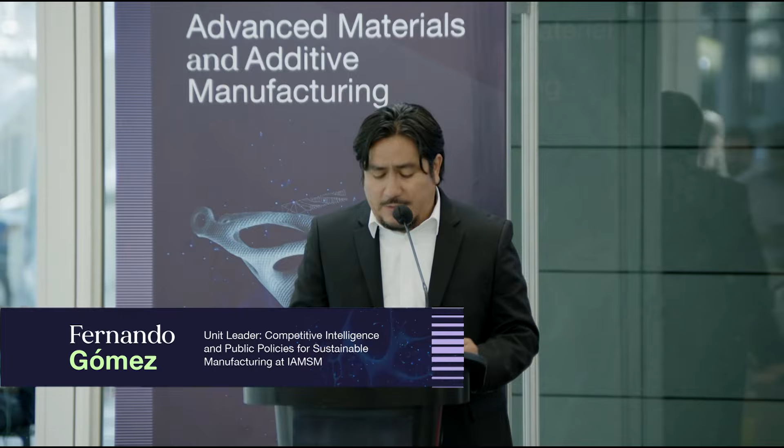Good afternoon, everyone. I'm Fernando Gomez, leader of the unit of the Competitive Intelligence and Public Policies for Sustainable Manufacturing at the Institute, and it is a pleasure to be here with you today. Now, I have the distinct honor of introducing our next speaker, Paulo Bartolo, Director of the Singapore Center for 3D Printing at Nanyang Technological University. Paulo will provide us with a unique insight into the capabilities of the 3D Printing Center in Singapore. Paulo, thank you for being with us, and the floor is yours.

Thank you very much. Thank you for your kind introduction. I would like also to thank Professor Alex Elias and Professor Arturo Molina for the invitation to be here. It's a great pleasure, and it has been a great week. I had the pleasure to attend the opening of the IAM lab, and to meet local authorities, industry, and many colleagues. And I have no doubts that what you are doing in the state of Nuevo León is the right thing. I don't have any doubts that you have a bright future ahead.

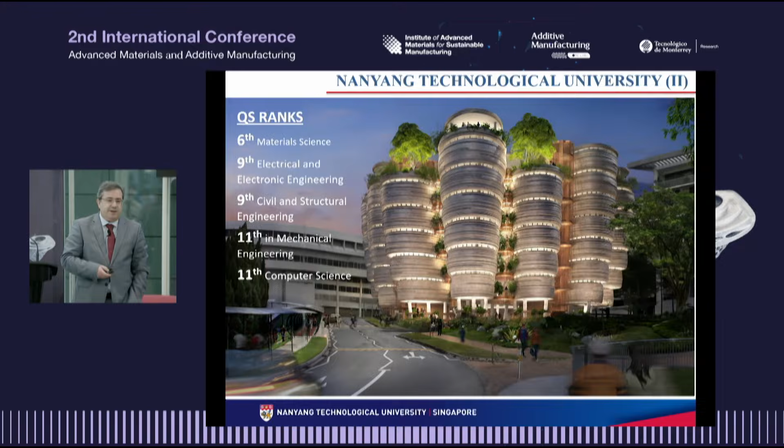Well, as it was mentioned, I'm a professor at Nanyang Technological University. This is a relatively young, research-intensive university, quite strong in science and engineering, especially in the areas of material science, civil engineering, electronics, mechanical engineering, and also computer science. And similar to Tec de Monterrey, with strong links with industry. This is part of our DNA. In our campus, we have more than 250 companies, and we have also major collaborations with industry in the form of Corp Labs. A few examples include the Corp Lab with HP, which is the largest Corp Lab outside the United States, and the Corp Lab with Rolls-Royce, which is also the largest Corp Lab outside the UK.

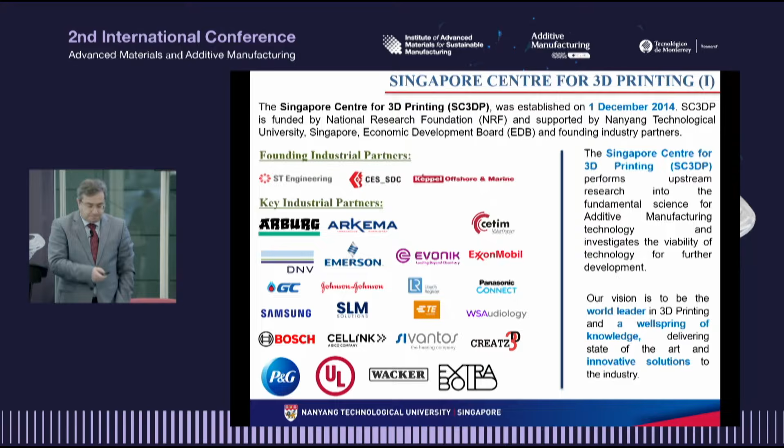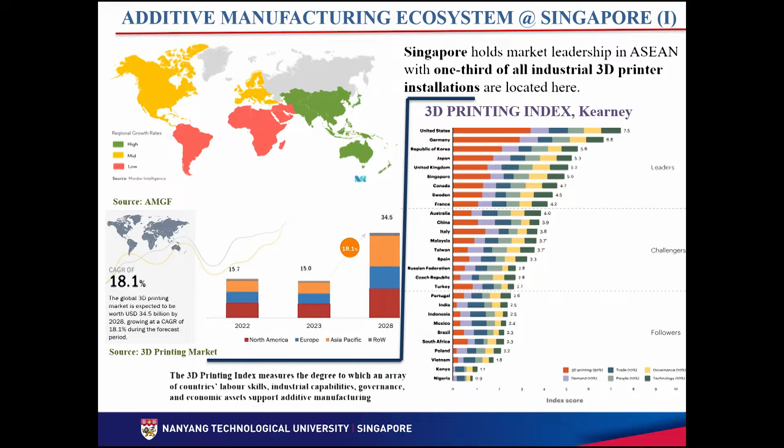Well, at NTU, I'm the Executive Director of the Singapore Center for 3D Printing. This is a research center funded by the National Research Foundation and industry, and supported by NTU and by the Economic Development Board. And we are looking at all aspects related to additive manufacturing. Additive manufacturing is a strategic technology for Singapore, and this was recognized by the Singapore government when in 2013 it committed 500 million Singapore dollars to further develop the AM ecosystem. As you know, in Singapore we don't have heavy manufacturing industry, so our economy relies on knowledge and light manufacturing. So additive manufacturing and robotics play a key role for many industrial sectors in Singapore.

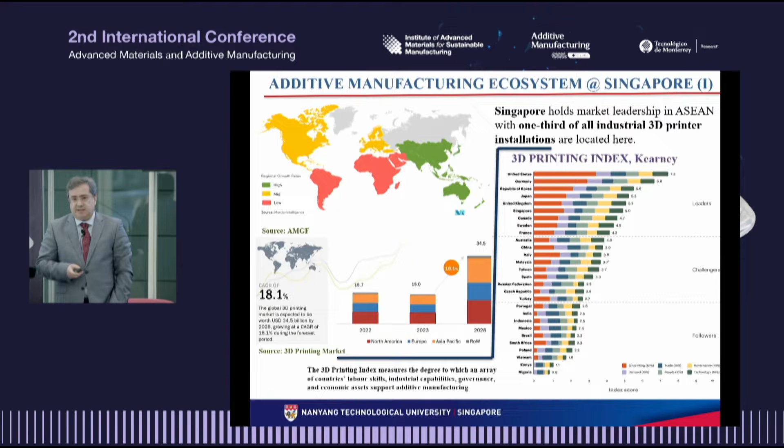Singapore was an early adopter of AM, so it is not strange to see Singapore as a leading country according to the 3D Printing Index. And to give you an idea about the relevance of this technology for Singapore, if you consider the ASEAN region, 1/3 of the industrial AM machines are located in Singapore. We have a vibrant AM ecosystem, so 25% of the global AM companies have a presence in Singapore. And the ecosystem consists of a large number of startup companies, service bureaus, regulators, and of course research centers such as the Singapore Center for 3D Printing.

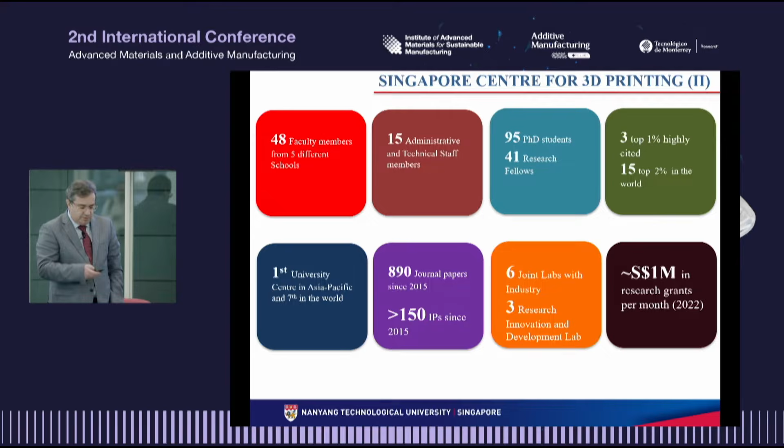We are a pan-university center. We have 48 faculty members working with us, 95 PhD students, 41 research fellows, and the activities are supported by 15 technical and administrative staff. We are very happy because the center was recently considered the best center in the Asia Pacific and one of the best centers in the world. And we have also very strong links with industry. Currently, we have 6 active industrial joint labs and 3 active research, innovation, and development labs. And I'm going to explain a little bit more about these 2 concepts later.

Well, at the center we are covering the entire value chain of additive manufacturing, from design till process digitization. And our research activities are organized around 8 pillars: 5 directly linked with key industrial sectors in Singapore, and 2 cross-sectorial pillars. One is future of manufacturing, which is about smart manufacturing, and the other one is design for 3D printing. And then we are hosting and coordinating the NAMIC Hub at NTU. NAMIC stands for the National Additive Manufacturing Innovation Cluster. It was an initiative launched by the government of Singapore in 2015, aiming to promote the adoption of AM and to build the AM ecosystem in Singapore. And we are coordinating this hub.

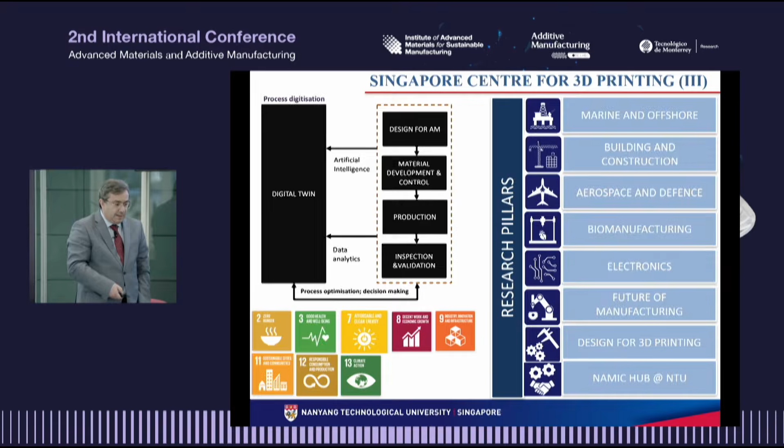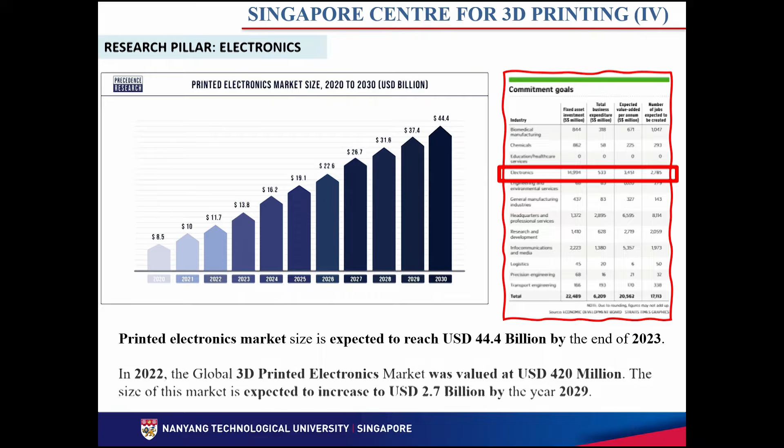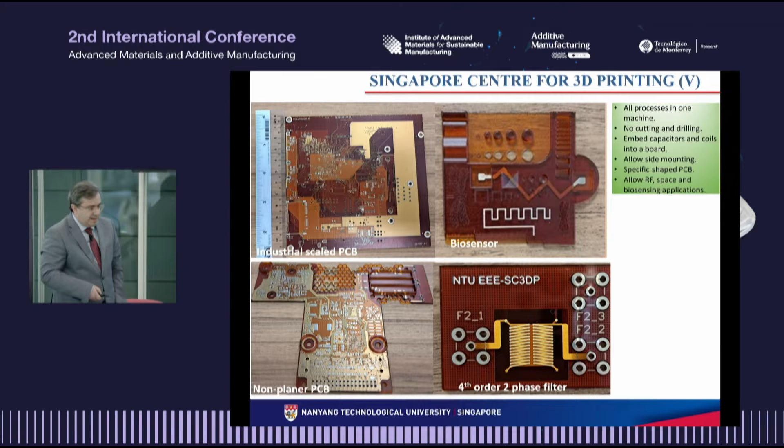The electronics pillar, and I'm going only to mention this, was the most recent pillar that we established at the center, for a couple of reasons. One is because electronics is a very important industrial sector in Singapore. And the second reason is because this is an area growing very fast in the world. By 2022, the market size of 3D printed electronics was lower than 500 million US dollars, but it is expected to grow to close to 3 billion US dollars by 2029. So we are the only center in Singapore having capabilities to print electronics, and we are using this lab to print PCBs, biosensors, non-planar antennas, and flexible electronics, as you can see in this slide.

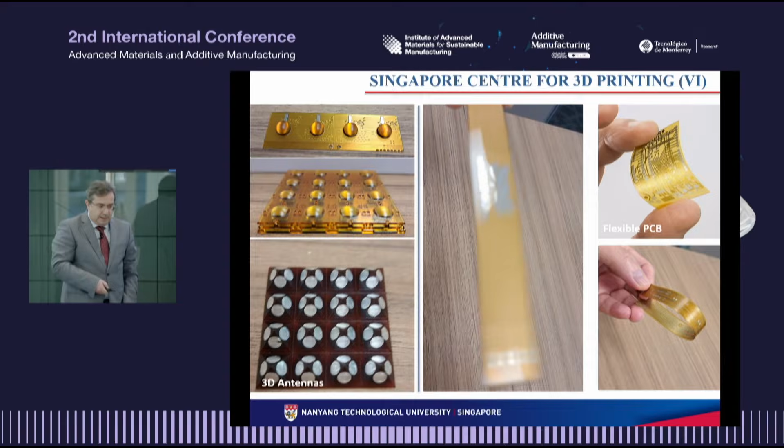We have also the normal one-to-one projects and industrial joint labs. These are major industrial collaborations, fully funded by industry, typically comprising a minimum of 2-3 projects and a minimum duration of 2 years. And then we have research, innovation, and development laboratories, partnerships with industry, but in this case, the companies, instead of supporting the collaboration with cash, they give us technology.

And in return, we work with those companies in 3 main areas. One is focusing on people, training, workshops, seminars, and the aim is to promote the adoption of the technology. The second domain is demonstration, so developing case studies with our researchers and students. And finally, development, more fundamental research projects. In this case, we seek alternative funding sources, and the aim is to license any technology that we develop by the end of those projects to these companies.

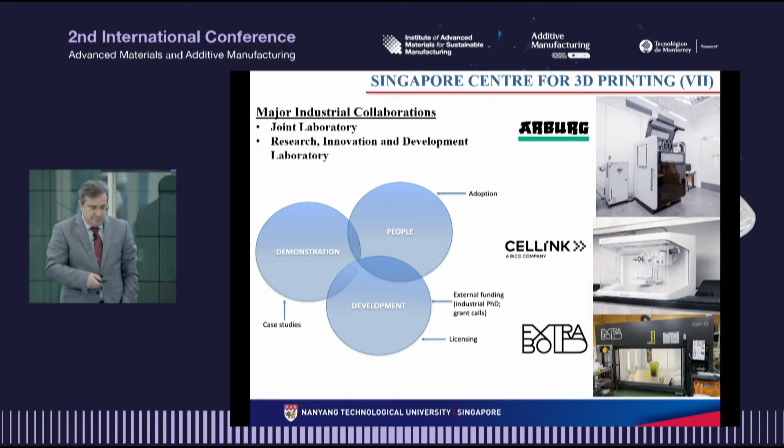We have 3 research, innovation, and development labs with 3 companies operating in the space of polymer-based AM, Arburg, Cellink, and Extrabold, and we are now discussing similar arrangements with 2 companies operating in the space of metal AM.

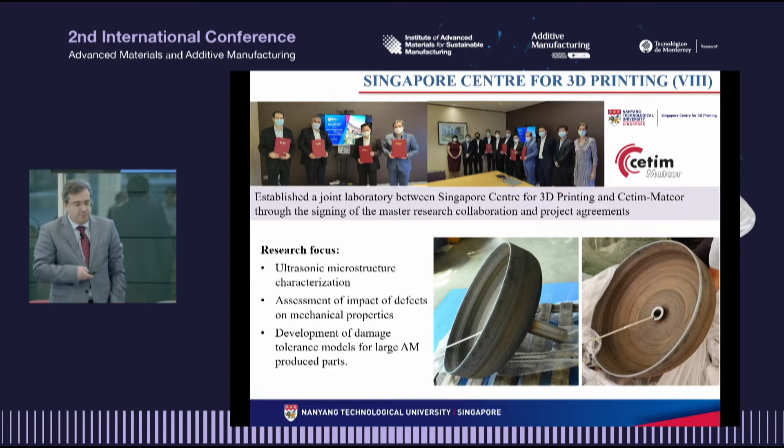I would like also to mention 2 examples of industrial joint labs. One is a joint lab that we started early last year with Cetim-Matcor, focusing on large AM part qualification and comprising 3 projects. One is related to ultrasonic microstructure. The second project is related to the assessment of impact of defects on mechanical properties. And the third related to the development of damage tolerance models for large metal AM parts.

The second example of joint lab is a joint lab that we have with Panasonic. We finished the first phase of the joint lab. The first phase was related to the development of technology to transform common carbon-based materials into highly porous graphene materials, and technologies to print such highly porous graphene on top of different types of substrates, paper, glass, fabrics, to create smart and flexible devices. We are starting a second phase of the joint lab in a totally different direction. So we are focusing on multi-material printing, electromagnetic materials, focusing on components for electrical motors.

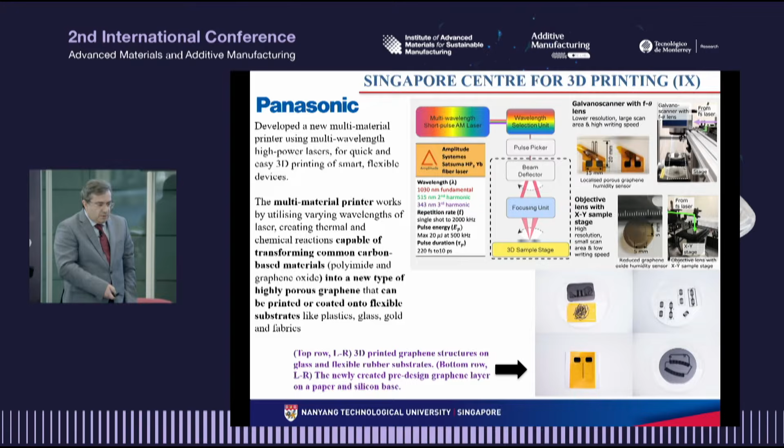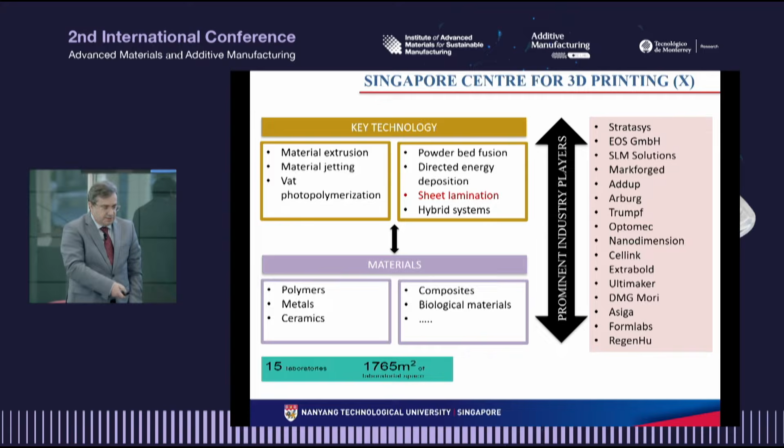Well, to run all of our research activities, we need to have state-of-the-art technology. So at the center, we have all types of AM technologies except binder jetting technology. So that's why we need to have a discussion with GE technology. We have commercially available machines. We are developing also our own systems, as I will show you. We don't have any commercially available sheet lamination technology. We are developing our own metal sheet lamination process. And as I mentioned, we are developing our own systems.

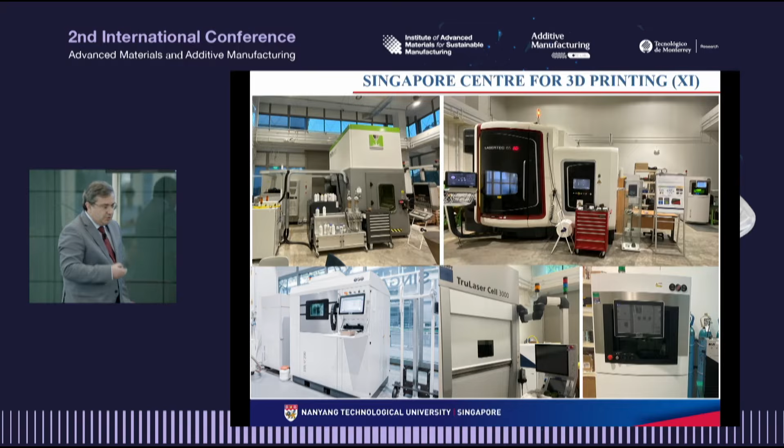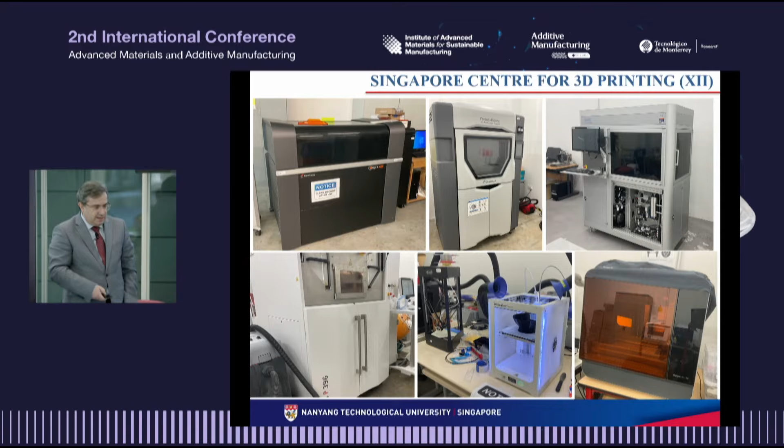So to give you an idea about our machine portfolio, these are some of our industrial-based machines. So we have a range of directed energy deposition machines, hybrid systems, several metal powder bed fusion machines, not only from EOS, but also from SLM Solutions, and then a range of other machines for polymeric materials, ceramics, and composite materials. And, as I mentioned, we are developing our own systems. One example is shown here.

So this is a powder bed fusion platform that we are developing to test different fabrication strategies, beam shaping, in situ alloying. This is an area quite strong at the center, especially for biomedical applications. We have a couple of patents related to in situ alloying of titanium-64, tantalum, titanium, niobium, to create metal plates with improved biocompatibility and reduced stress shielding effects.

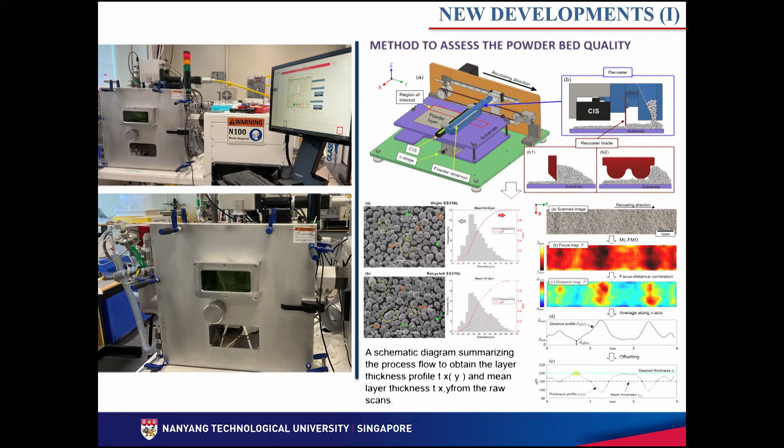We're developing other devices for this platform, and another example is shown here. So this is a scanning system being used to assess the powder bed quality, considering three main parameters: roughness, density, and thickness. Regarding powder bed fusion systems, we are also developing in-space manufacturing technology.

So as you know, contrary to what's happening in our labs, where due to gravity, particles settle, in space, due to the absence of gravity, particles scatter. There are different strategies to address this issue. One is using a centrifugal chamber. In our case, we are using acoustic waves to manipulate and to position particles in a three-dimensional space.

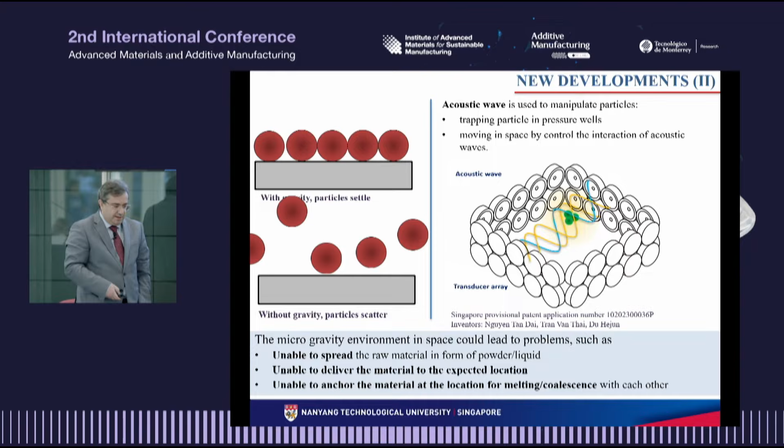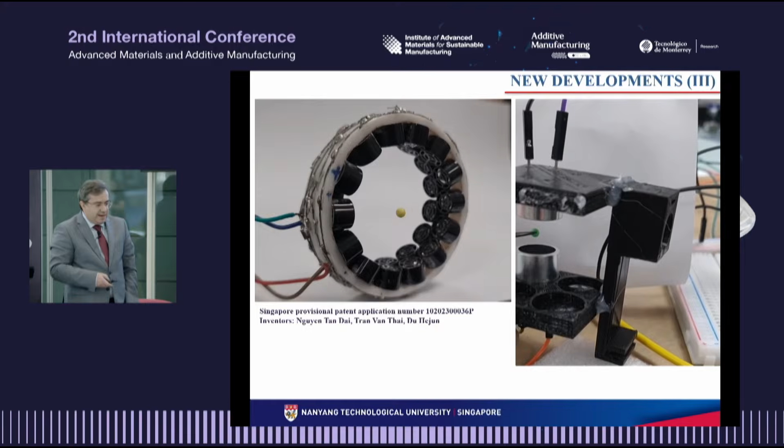And this can be visible in this video showing the change in position of this particle in a three-dimensional space by changing the acoustic wave. And if we induce any disruption to the particle, once we stop this disruption, the particle returns to the original configuration. So our aim is to combine this acoustic wave system together with a laser beam for material consolidation for in-space manufacturing.

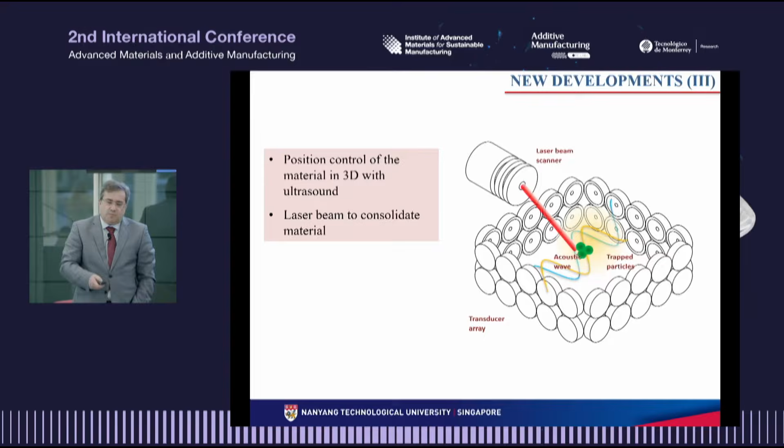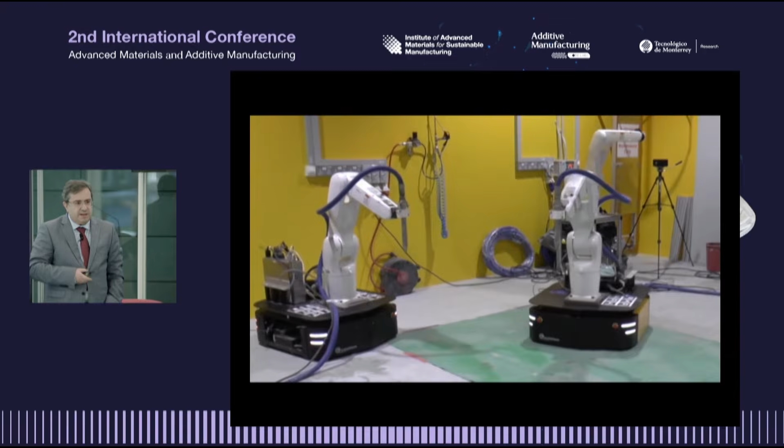We are developing gantry systems, robotic systems, and we are also exploring mobile robots. This is an example. In this case, we have two mobile robots to print a large concrete printing. Not very complex in terms of control, because each mobile robot has a very well-defined printing region, so there is only a very small region of potential collision.

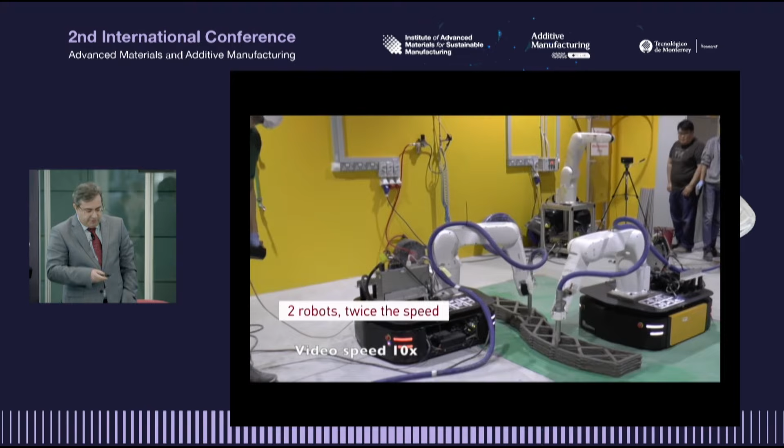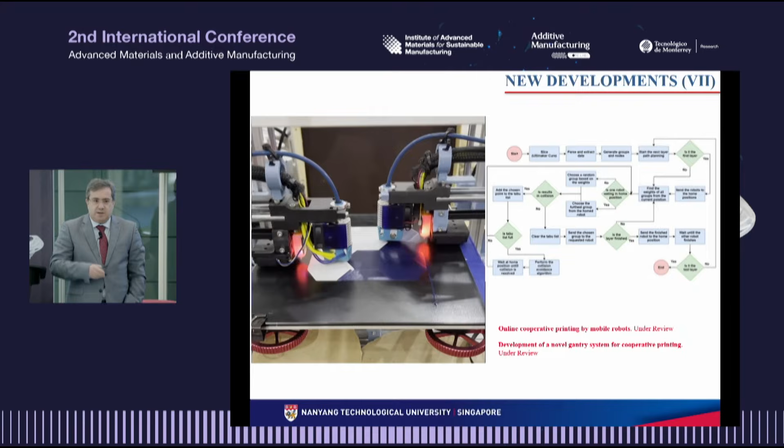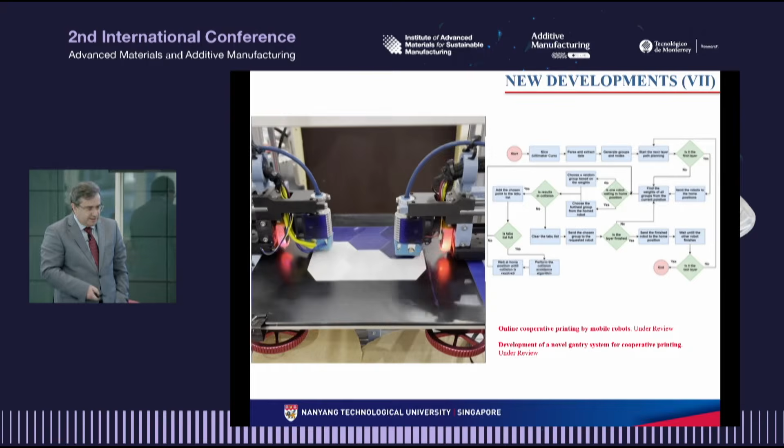But we are working also on much more complex systems, and this is one example. So in this case, we have a cooperative printing process, so two gantry systems controlling two filament-based printing heads, printing two different materials, but printing these materials in common regions, which requires much more complex and sophisticated path planning and collision avoidance algorithms. And of course, we are also using, if you don't mind to play the video, the robotic system to print large objects.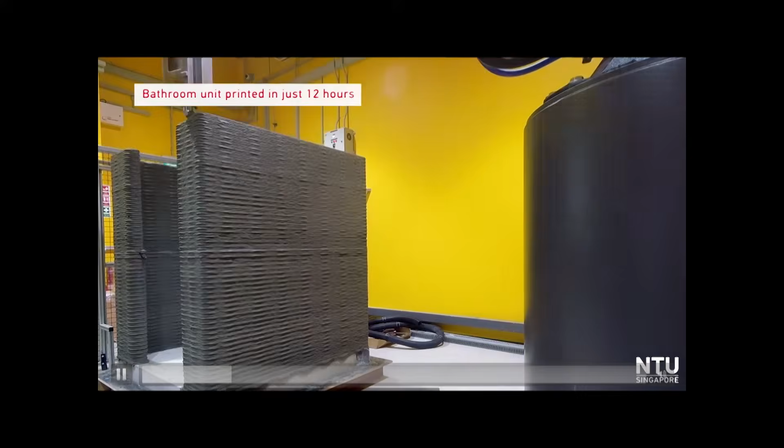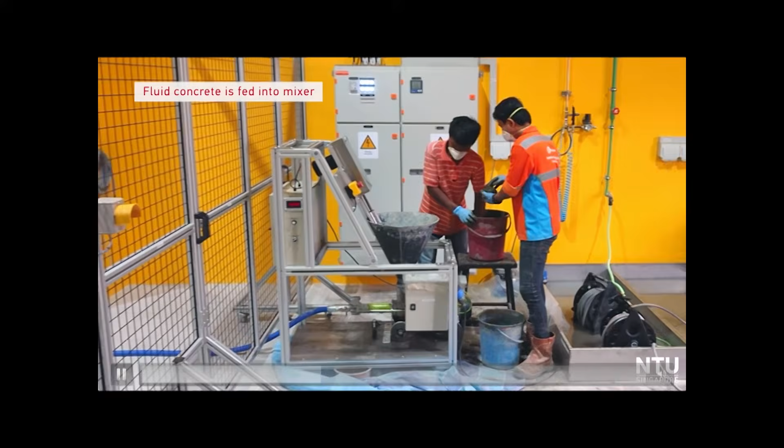And this is an iconic product. It's a 3D printed bathroom unit. This was the first version of the bathroom unit. It was printed in two parts because we had a limitation due to a ceiling issue. We solved this problem, and in the second phase, we printed the bathroom unit in a single stage, reducing the printing time from 12 hours to 9 hours.

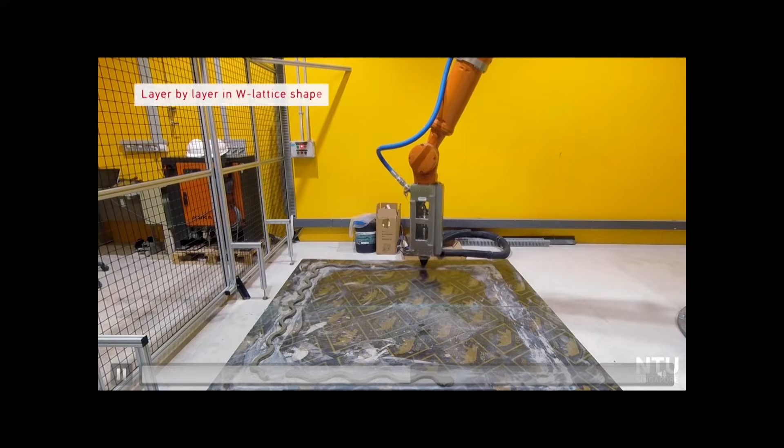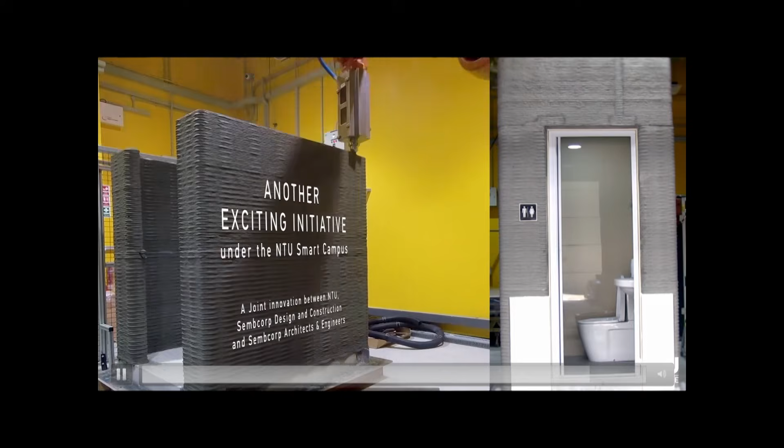We published a paper in the Journal of Cleaner Production showing also that by using 3D printing, we achieve a cost reduction of 48% compared to a traditional method, and a reduction in CO2 emissions of 89%. The bathroom unit was fully certified by the Building and Construction Authority of Singapore, and we licensed the materials and the technology to a construction company in Singapore.

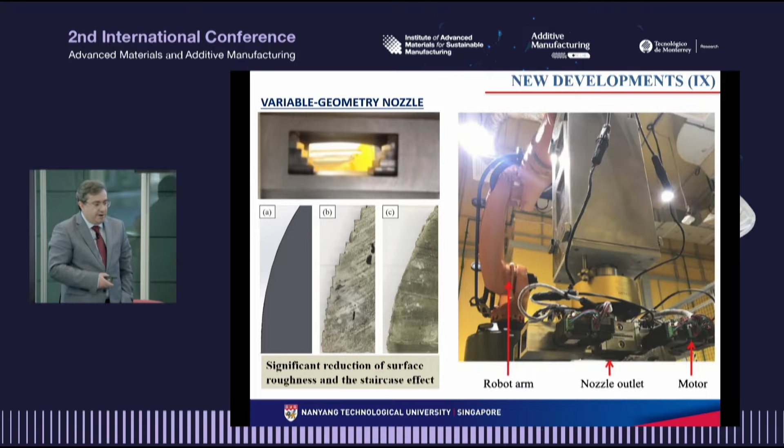We are developing also different types of printing heads, and talking about construction, this is a variable geometry nozzle, so it changes the configuration in order to avoid the typical stair-step effect that we have in additive manufacturing, especially in curved surfaces, and particularly critical when we use high layer thickness. So with this variable geometry nozzle, we achieve very good surface finishing.

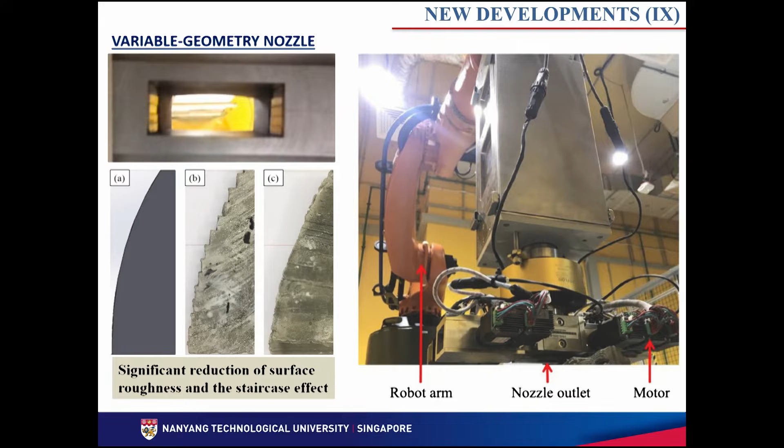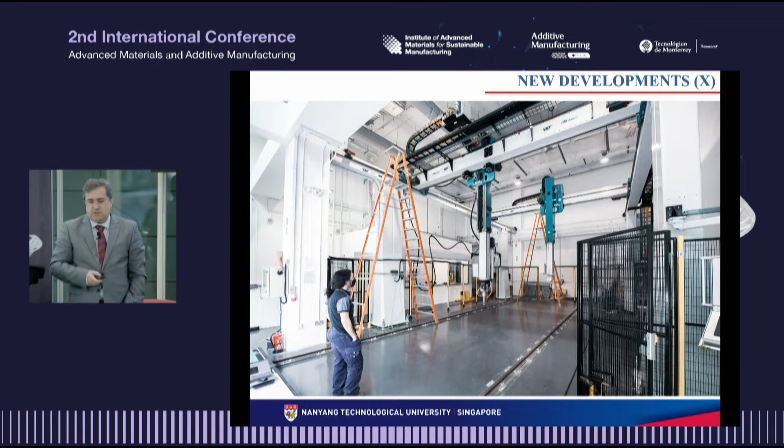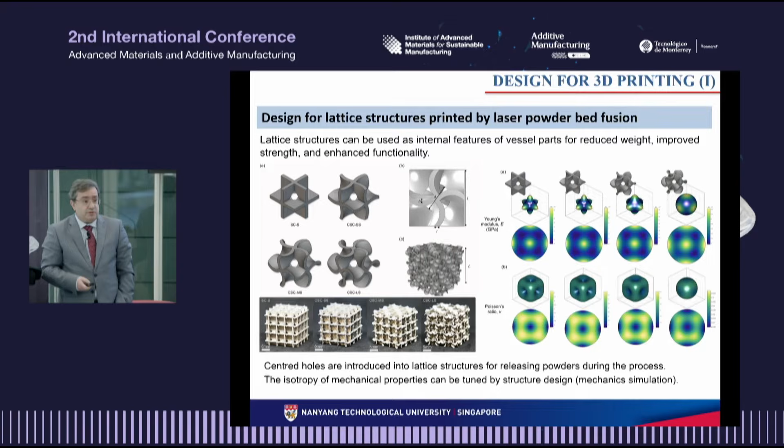Well, I mentioned that one of our pillars is design for 3D printing. I mentioned also that in all the different research pillars, we cover the entire value chain of additive manufacturing, which starts with design for 3D printing. And within the design for 3D printing, we are focusing on things like design for sustainability, design with non-conventional materials, design to minimize post-processing, and also design for lightweighting. We are using topology optimization, but we are also using different types of lattice structures.

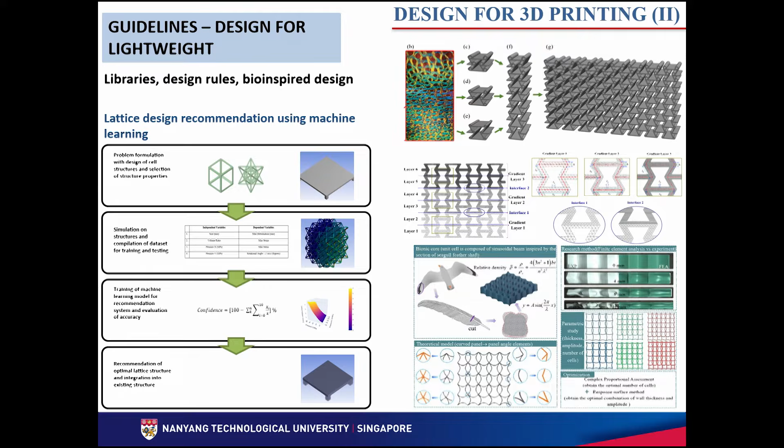We have a project with an aerospace company based in Singapore, ST Engineering, where we are investigating different types of lattice units, creating a library, developing design rules for the assembly of these different units, and machine learning tools to design parts using the different lattice units that we have in our library.

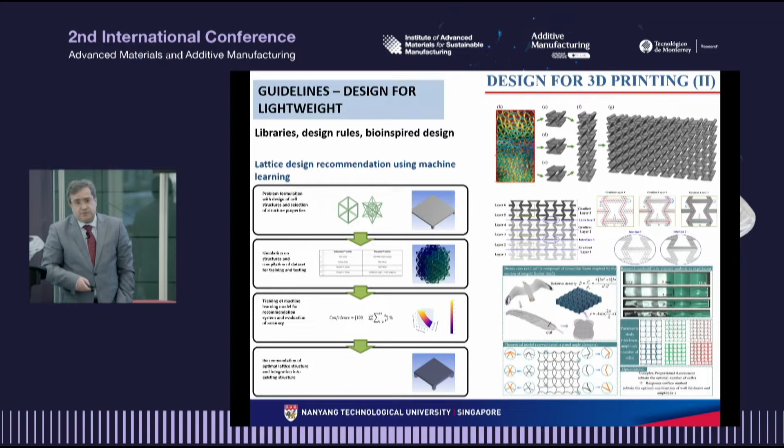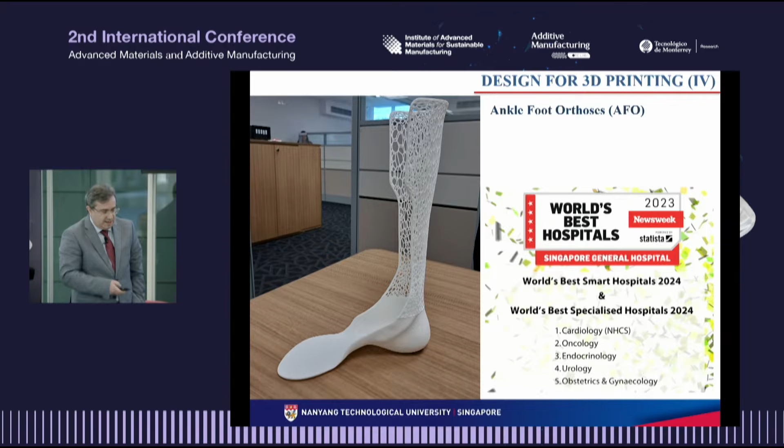And we are using lattice structures for a range of applications, including shock absorbers, heat exchangers, valves, and other products like this AFO, which was designed and developed in partnership with clinicians from the Singapore General Hospital for a patient suffering from a specific type of diabetes, limiting the mobility of the lower part of the leg. This is part of a joint lab that we have with the Singapore General Hospital, focusing on the use of additive manufacturing to print different types of biomodels and medical devices.

Well, when we create a lattice structure, of course it is important to understand the behavior of each unit cell, but it is also important to understand the impact of the fabrication technique that we use to create a lattice structure. And we show that in a paper that we published last year, when we use a reentrant lattice unit to create a lattice structure, and we printed this lattice structure using two different technologies. We used electron beam melting, not a GE, but an Arcam machine, and a laser powder bed fusion machine.

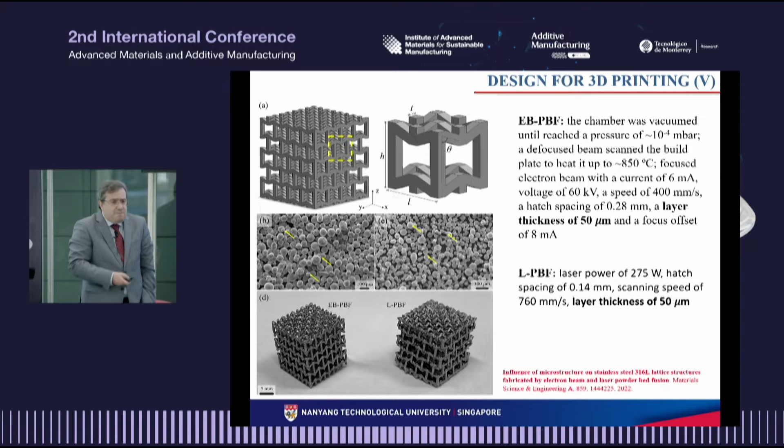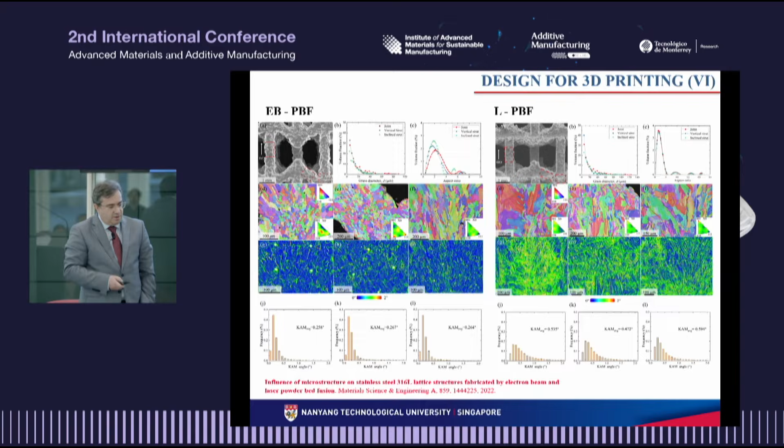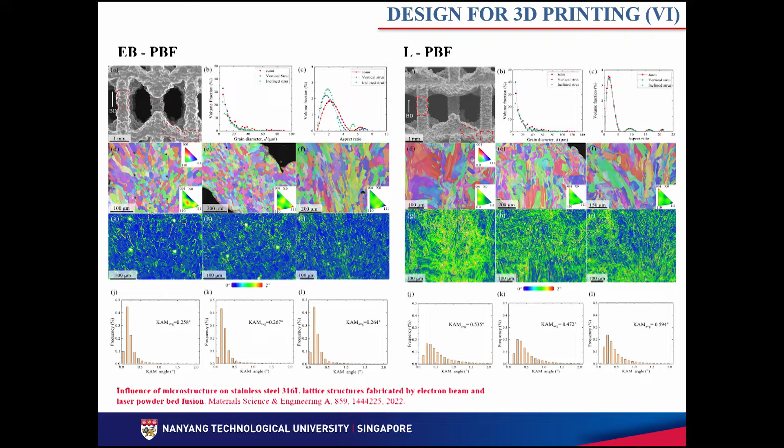And basically, due to the different thermal conditions, we obtain a totally different microstructure, which had an impact on the mechanical properties and energy absorbance of the lattice structure. So it is important, of course, to pay attention to the design and the behavior of the different units, but the process plays a critical role. And I'm going to mention this a little bit more in detail later.

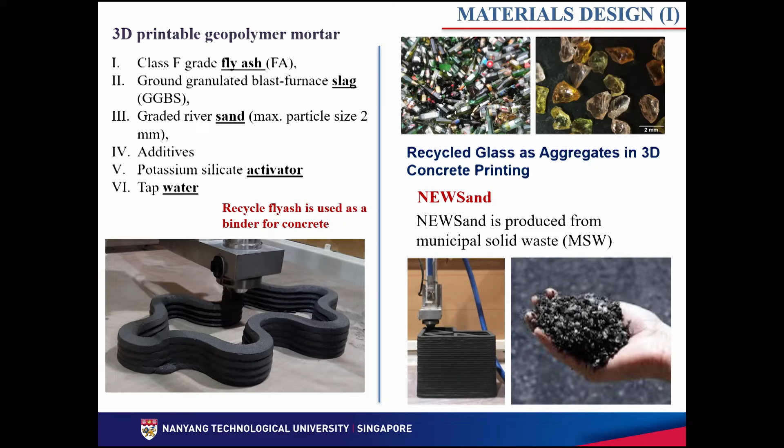Well, additive manufacturing, and every time that I describe additive manufacturing, I mention that for us, additive manufacturing is a platform for materials design. And this is what we are doing at the Singapore Center for 3D Printing. And we are designing materials for different types of applications according to our different research pillars.

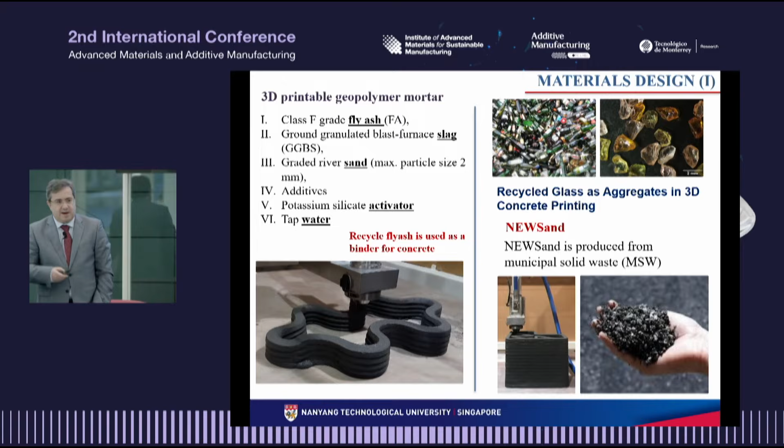For example, for building and construction, we are developing formulations comprising fly ash, incorporating recyclable glass, using synthetic sand to replace natural sand, always with the aim to reduce the amount of cement or the use of natural sand to minimize the environmental impact of these construction materials.

We are also certifying materials, and one example is shown here. This was a project together with a marine and offshore company in Singapore, Keppel, and with Lloyd's Register. We certified EH36 in the form of powder and wire for directed energy deposition.

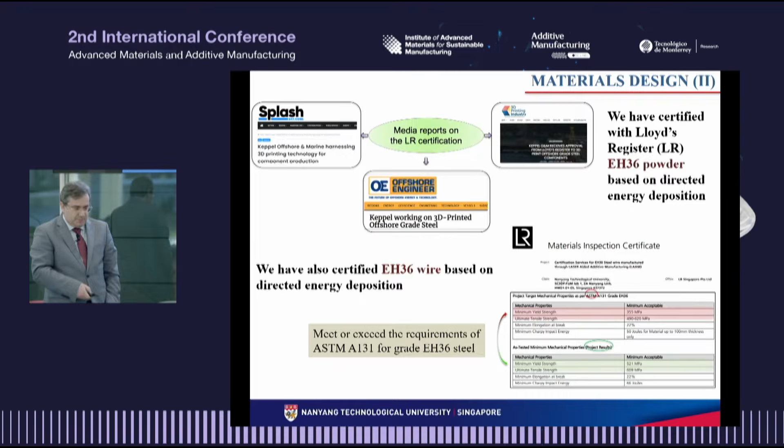In a totally different area, we are using additive manufacturing to design biomaterials for biomedical applications. And one example is shown here. So we spent a couple of years developing our own electroactive scaffolds. If you don't know, a scaffold is a biocompatible and biodegradable three-dimensional porous structure, designed to support cell attachment, proliferation, and differentiation in order to create a new tissue.

So we designed these scaffolds containing biodegradable non-conductive polymers and certain amounts of conductive materials. And we use multi-wall carbon nanotubes or graphene. It was important to identify the critical value of these conductive materials to avoid any cytotoxicity. And we tested in the lab and also preliminary tests with small animals, rats.

We created critical size defects in the calvaria of rats, and we used our electroactive scaffolds and compared the performance of our electroactive scaffolds with non-conductive scaffolds, using or not an external electrical stimulation. And what we observed was that by combining the use of these electroactive scaffolds and external stimulation, it was possible to accelerate angiogenesis, so the formation of the vascular system, and mineralization, obtaining a more organized bone.

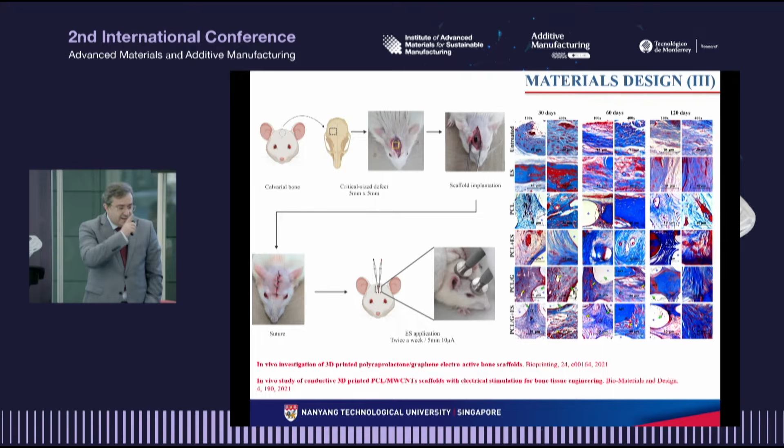We are testing the same scaffolds with large animals now, using sheep, and we are also moving from the concept of electroactive scaffolds, because this requires the use of an external electrical stimulation source, towards the concept of piezoelectric scaffolds. But nevertheless, some of the lessons that we took from this project help us in designing more complex scaffolds, in this case for bone cancer applications.

So as you know, in the case of bone cancer, the most common clinical approach is tumor resection, but fatality and recurrence rate is quite high because it's difficult to remove all the cancer cells. So to address that, we designed what we call a dual function scaffold, controlling the amount of graphene or graphene oxide to have two different functions.

So the outer layers of our scaffold were designed to contain very critical levels of graphene. This promotes high levels of reactive oxygen species, inducing oxidative stress. And we realized that cancer cells are more sensitive to these high levels of reactive oxygen species than healthy cells. So our major task was to identify the critical value of graphene to produce enough reactive oxygen species killing the cancer cells without having any impact on the healthy cells.

And then the core region of the scaffold contained relatively small amounts of graphene, taking advantage of the high mechanical properties of graphene and the electrical conductivity to recruit new cells from the surrounding tissue, promoting the formation of new bone.

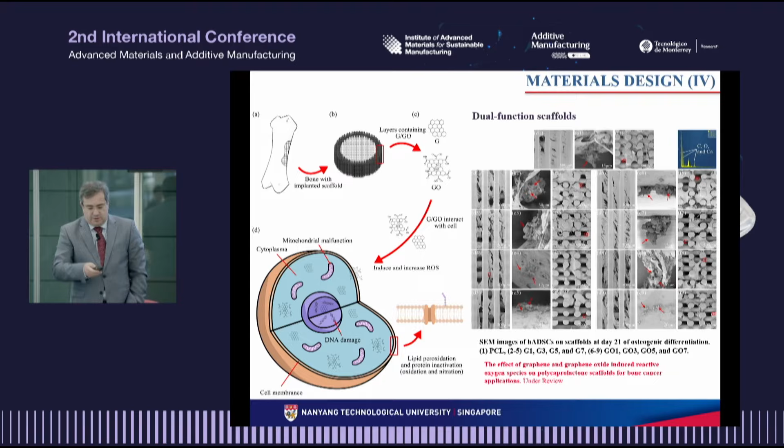Another important area in terms of material design is related to the use of additive manufacturing to print smart materials. So materials that can change their shape, color, properties in response to variations of environmental conditions, temperature, pH, humidity. One example is shown in this video.

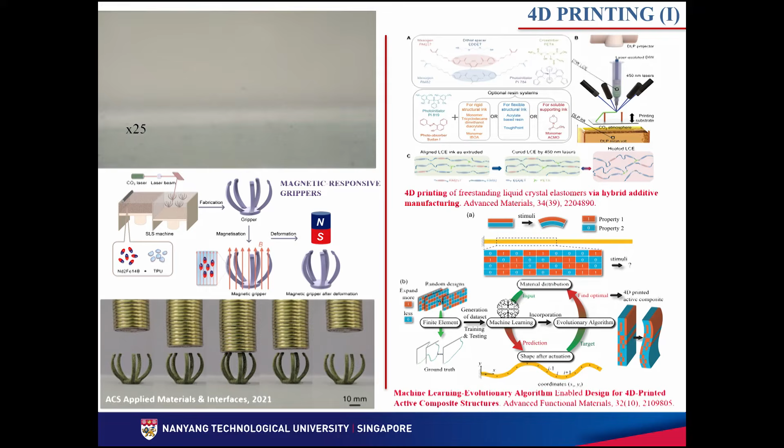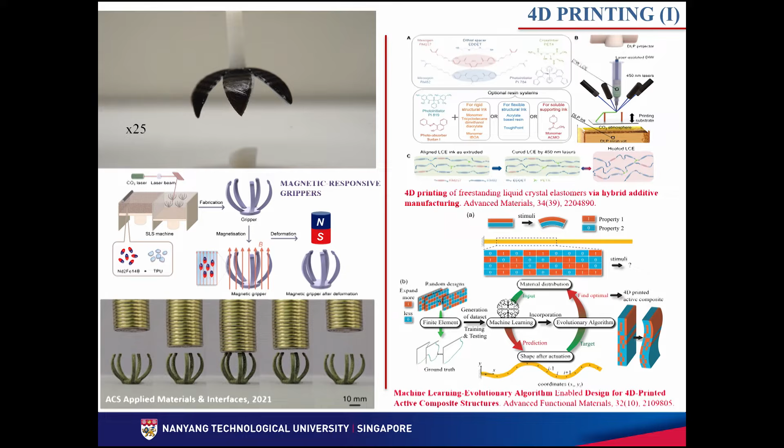So this is a gripper in action without supplying any electrical current, changing the shape in response to changes in temperature. This gripper was printed using an extrusion machine and a PETG-based material, but we can design a gripper sensitive to other stimuli, like shown here, where we use a laser powder bed fusion machine to create magnetic responsive grippers using thermoplastic polyurethane powders mixed with nanoparticles. And we are designing different types of smart materials.

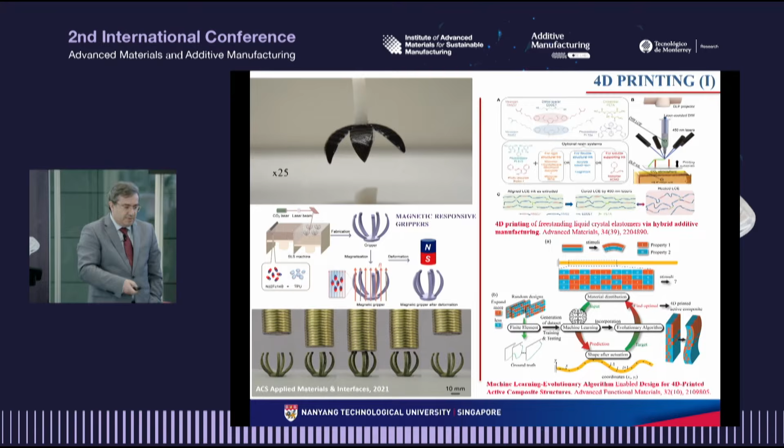We are using artificial intelligence to design the different blocks or the different architectures of these materials in order to achieve a specific performance. Let me give you more details using one recent example, and this is related to stretchable electronics. Very important for soft robotics, for electronic skin, for wearable devices, but presenting a challenge. And the challenge is the difficulty to create a single component showing high electrical properties, self-healing, shape morphing, and stretch stability.

We solved this problem by designing a hydrogel, a dual cross-linkable hydrogel, comprising covalently cross-linkable acrylic acid and iron ions through the formation of a reversible ionic network.

We tested the hydrogels, bending, twisting, stretching, and the results show super stretchability. So it was possible to stretch the material 17 times its original size. The materials also show self-healing, and we demonstrated that by cutting a single component into pieces and then putting the two pieces together at room temperature for 1 hour to recreate the original single component. And the recreated single component exhibited again high stretchability.

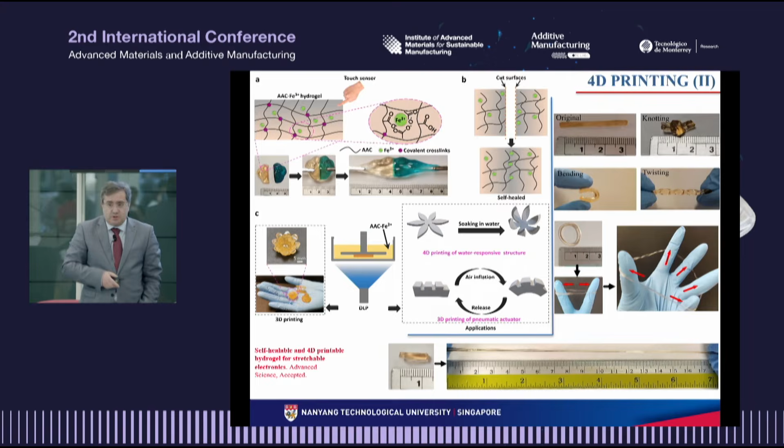We printed different types of shape morphing materials, soft and pneumatic actuators. And we also show that the developed hydrogel presents touch sensing properties. And we demonstrated that by printing one-dimensional touch strips and two-dimensional touch panels. We connected the touch panel with electrodes interfaced with the monitor through sensing circuits.

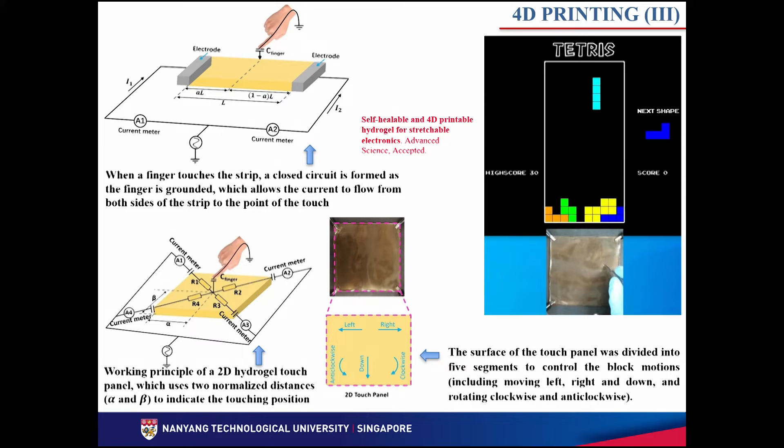And one of the final tests, unfortunately I don't have the video, but the video will be available in Advanced Science, was to interface the touch panel with a modified Tetris game. And by using our touch panel, it was possible to control the movement and orientation of the Tetris pieces.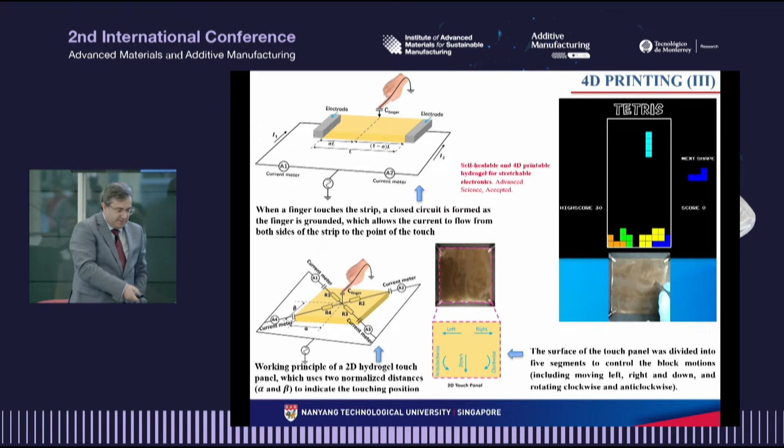This is a very interesting technology characterized by, as you know, high build rates, but the 3D printed parts experience very complex thermal conditions leading to heterogeneous microstructures. So this is an area where we are putting lots of effort to understand the impact of these thermal conditions on the microstructure and mechanical properties.

We are using DED to design different materials, including functionally graded structures. And one recent material that we decided to explore is nickel aluminum bronze alloy, due to its relevance for aerospace and marine and offshore applications. We had a project with Keppel, a marine and offshore company in Singapore, where we used DED to create a bimetallic structure using nickel aluminum bronze alloy and 15-5 PH. And the aim was to create a part with high mechanical properties and corrosion resistance.

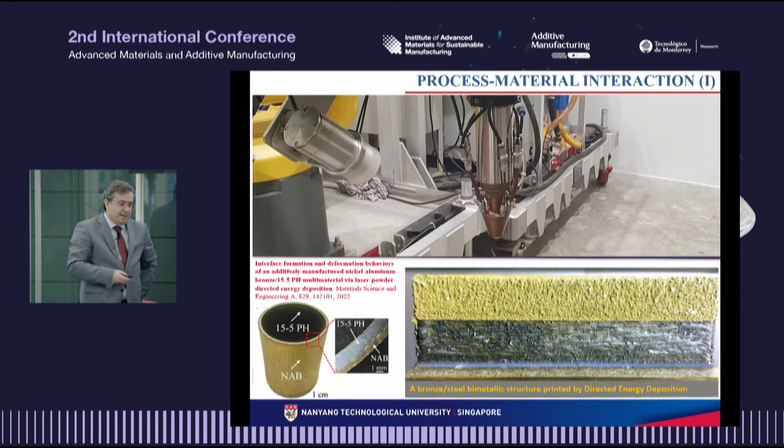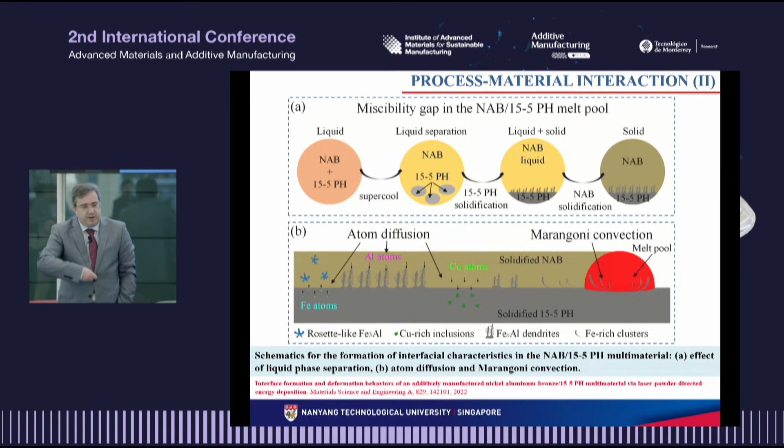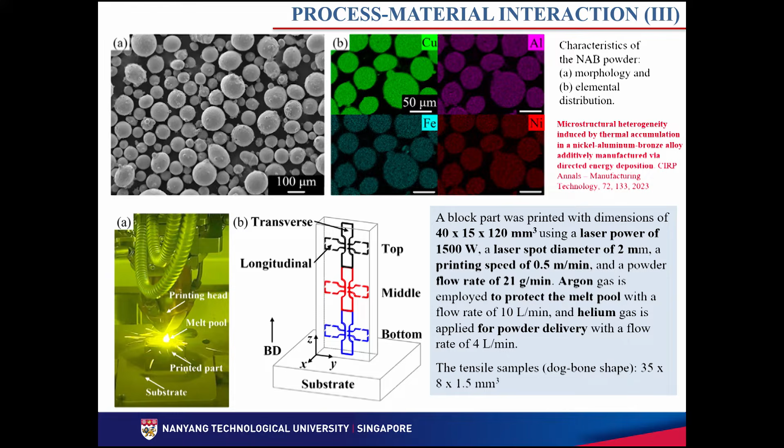Through process optimization, it was possible to obtain a very well-defined and well-bonded interface. And this was essentially due to the synergetic effect of liquid phase separation, Marangoni convection, and atom diffusion, forming a dendritic interface and ferroalloys. But for this material, there is limited knowledge on the effect of the thermal conditions on the microstructure and mechanical properties. So this is an area where we are trying to understand and develop strategies to improve the performance of parts. So we published a paper recently, and

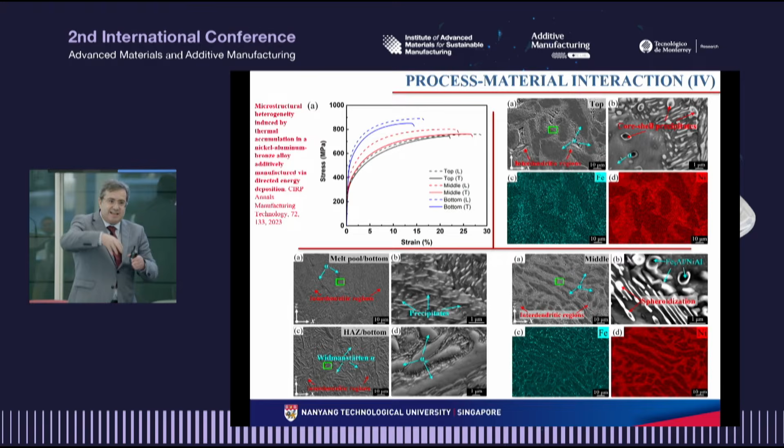DED part. And the results show, as expected, a heterogeneous microstructure from the top to the bottom, with consequences in terms of the mechanical properties. And this was essentially due to the dominant effect of conduction in the cooling process. And as we move the melt pool away from the substrate, the conduction effect becomes less effective. So in the paper, we also discuss strategies to control the input energy or use other external sources in order to have better control of the microstructure and the mechanical properties of the parts.

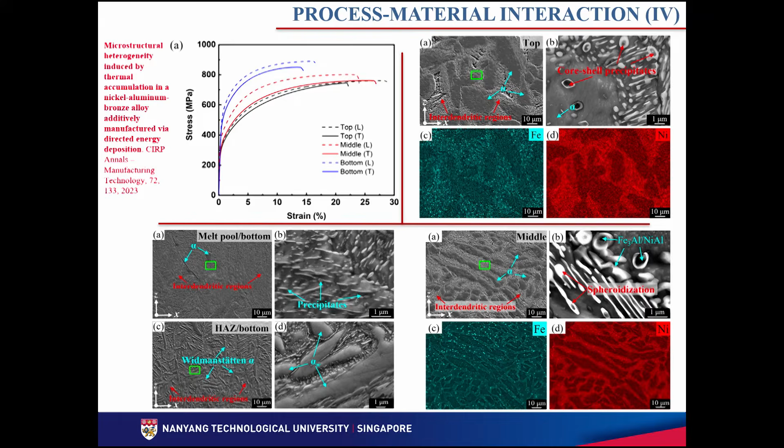Another example of how we can design performance by controlling the microstructure is again related to bone scaffolds. So in this case, we produced PCL-TCP, a bioceramic material, using two different fabrication routes. In one case, we used a melt printing process characterized by temperature-induced crystallization, leading to the formation of large and interconnected spherulitic structures. And the second was a solvent printing approach. So we created an ink using dichloromethane.

And this process was characterized by strain-induced crystallization, leading to the formation of relatively small and fragmented lamella-like structures and shish-kebab crystals. And as a consequence of this different microstructure, we printed scaffolds with the same geometrical characteristics, but totally different properties, biological properties, physicochemical properties. The scaffolds that we produced through the melt printing route show high mechanical properties. Printed filaments were quite stiff, and when we seeded the scaffolds with cells, we observed the formation of large levels of YAP promoting cell proliferation.

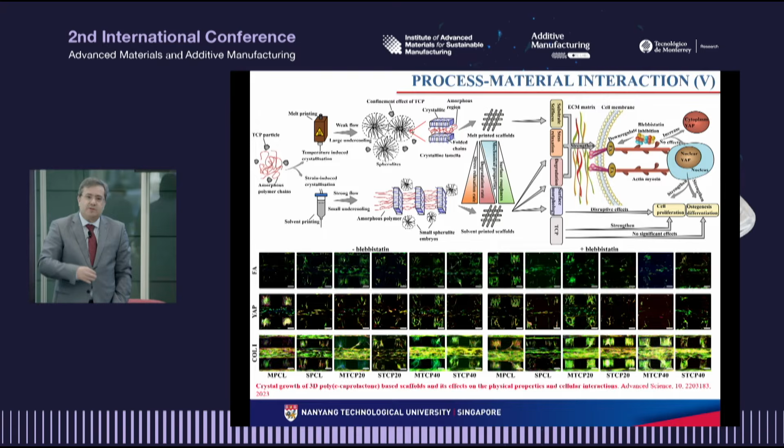While the scaffolds printed using the solvent printing strategy exhibited high surface roughness, fast degradation and stress relaxation. And this fast degradation and stress relaxation created a more dynamic environment that promotes early stage osteogenic behavior. So totally different mechanisms, same materials, same architecture, but because we changed the microstructure, we induced a different performance.

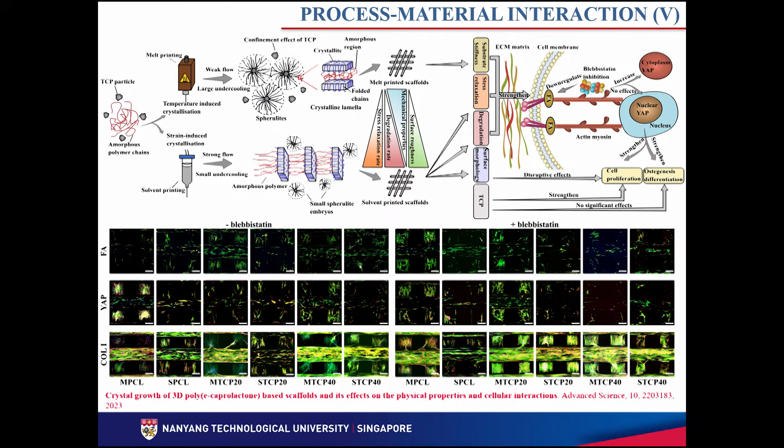I'm going to finish with a final example, related to how we can use additive manufacturing to design parts aiming to achieve a specific performance. I'm going to show the next slide, and I'm very sorry because it contains lots of blood. Oh, sorry, not this one. So this is part of a...

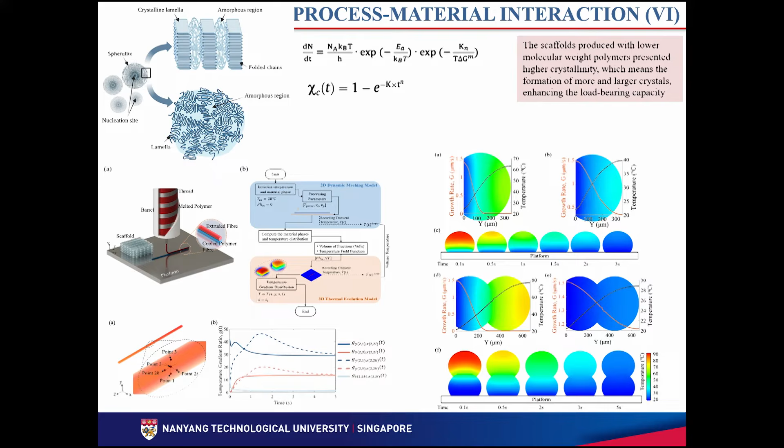complete study where we are developing software tools to design the performance of the part. We develop nucleation models, crystallization models that are coupled with thermal models to describe things like crystal orientation, crystal size, and crystallinity during the fabrication process. We are using this tool to design the anisotropy of the parts. I mentioned one of these days that this is particularly critical.

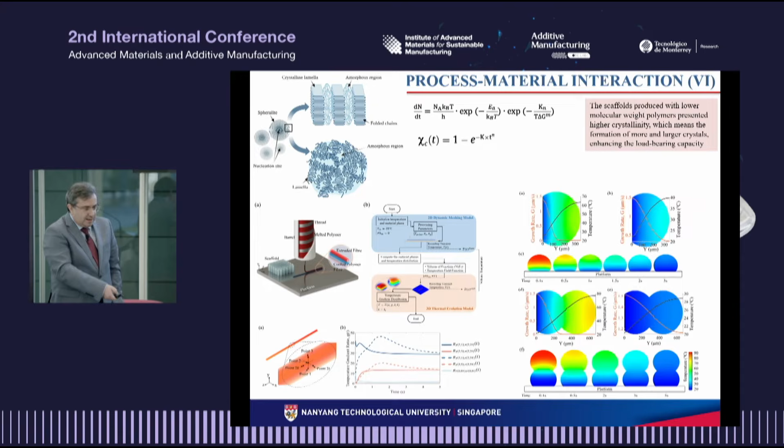Anisotropy in these cases is related to the layer-by-layer fabrication process and also to the cooling process. We are not paying attention to the layer-by-layer process; we are focusing on the anisotropy induced by the cooling process. I think the next slide has some blood, so sorry for it.

A couple of years ago, I was impressed with a situation I saw in Turkey with patients, refugees from Syria, suffering from significant bone loss issues. The only alternative for the clinicians was amputation. So we decided to develop a strategy to address this issue.

We developed anatomically designed scaffolds, multi-material scaffolds, and we are testing these scaffolds in sheep after several studies. Such kind of defect was never tried before. The only problem is that we are designing these scaffolds for time equals zero, so for today. We don't know the long-term behavior of these scaffolds, and this requires extensive animal studies.

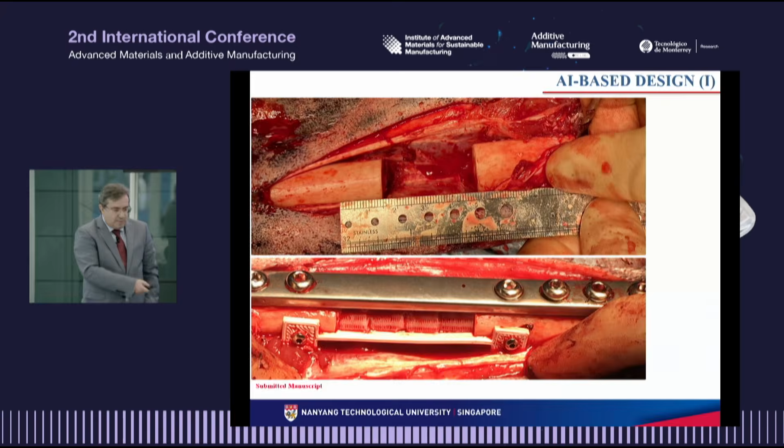That's why we are using artificial intelligence. The idea is to train the networks with histological images, through this in silico animal study platform that we are developing, to understand the long-term behavior of scaffolds by changing the architecture or the material composition.

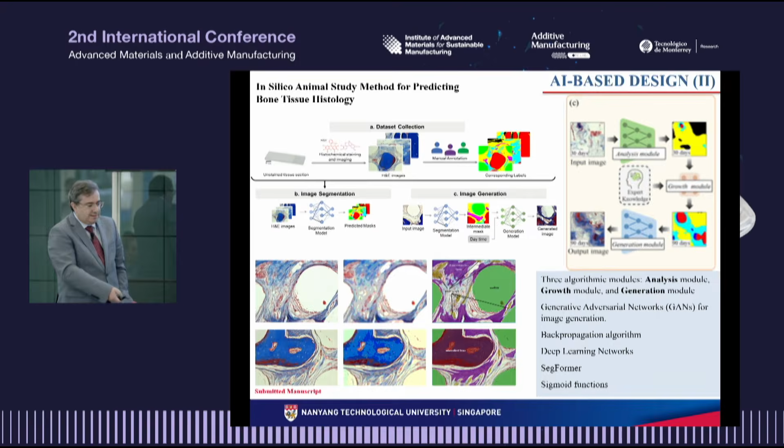And with this, I finish my talk. I promise to keep the presentation on time. Again, thank you very much for the invitation, and thank you very much for listening to me.